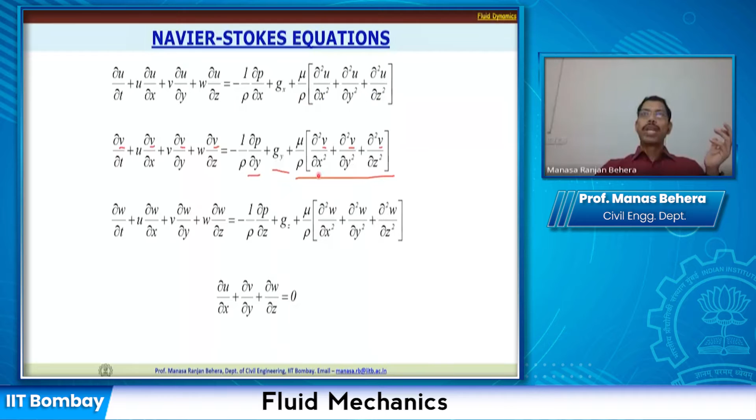So if it is del square, it is dou square by dou x square plus dou square by dou y square plus dou square by dou z square, and operated on u will give you that equation which we had written in our previous slide. Okay, this one. So this is nothing but your del square u. Similarly this is going to be del square v, this is del square w. So that is what we have written here. All right, now still you have these three equations.

Now if I write down in vectorial form this u, v and w as capital V, which is a vector, a combination of u, v and w in the respective directions, I can straight away write dV by dt is equals to g, the vector in the corresponding directions, minus 1 by rho del p. This del is again dou by dou x, dou by dou y, dou by dou z. So depending on the direction that you are trying to resolve, this term is going to come up.

And here again similarly you have mu by rho del square V. So if you are talking about x direction, u is going to come. If you are talking about y direction, v is going to come. If it is z direction, w is going to come. Okay, so finally we can write down this simple compact equation, which is nothing but your momentum equation of motion. And in addition you have this continuity equation which needs to be used to solve all the flow variables.

All right. Now having understood this, as I said some time before, this Navier-Stokes equation is applicable to solve real fluid flow problems. Now, if I have some place where I want to solve the flow which is considered as inviscid, or I really don't have to address the viscous effect of the fluid flow, in that case I can neglect this part, which is basically the force exerted due to the viscosity of the fluid, or the viscous force can be neglected.

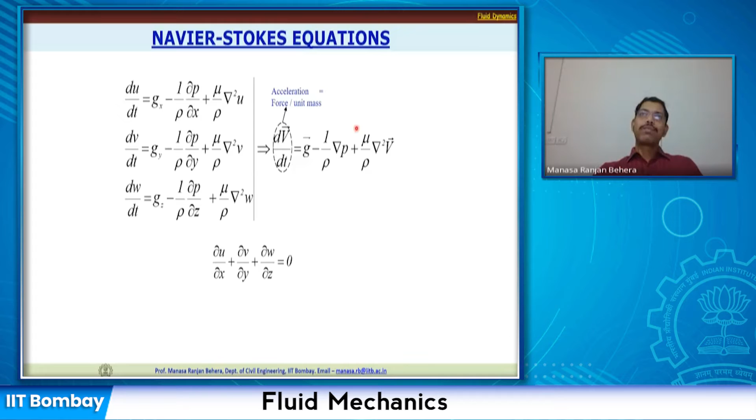Now if I do that, the equation that I'm going to get is nothing but your Euler's equation. So Euler's equation is applicable for inviscid flows. In other words, it is ideal fluid, where viscosity is not there. So the moment we say that the viscous effect is negligible, when we are not solving that mu by rho del square V term, then we can call it Euler's equation. So for Euler's equation we will not have the viscous term present.

So for all three different directions we can write down the terms. In addition to this, we will also solve the continuity equation, because still we have four unknowns. So we'll have to solve four equations, and all these four equations are nothing but your Euler's equations. Now, we have already derived the Navier-Stokes equation, and from that we have come all the way here.

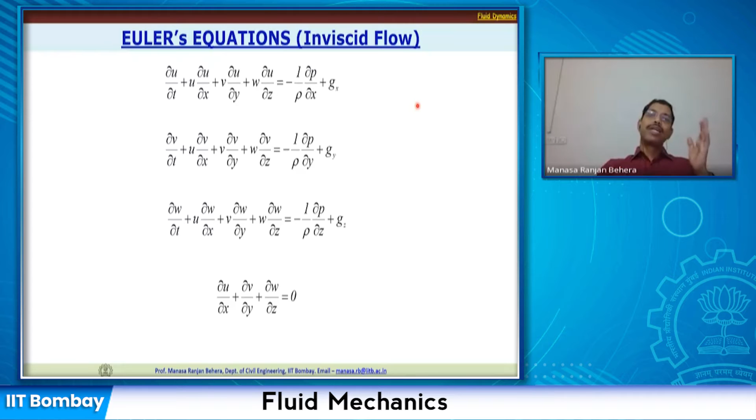But if somebody wants to derive the whole Euler's equation in a different way, that also is possible. So for that, you take one fluid element. Again, I am just taking a fluid element.

In this, you can either take P here, and the pressure here is going to be P plus ∂P/∂x into dx. Or if I take the pressure P at the center, then on this side it is going to be P minus ∂P/∂x δx/2 applied over the area δy δz, and on this face it is going to be P plus ∂P/∂x multiplied by δx/2 applied over the area δy δz.

Okay, so it's all the same, there's no difference. You do it this way or that way, finally the solution is going to be unique. So now let us consider this, which is basically an element having δx, δy, δz as the dimensions in the respective x, y, and z directions, and the body force acting on this fluid element is noted here as X, Y, and Z in the respective directions. It is the body force per unit mass.

So in this case, weight may be taken as a component of g, since force per unit mass is equal to acceleration. Now let us resolve in the x direction. We will write all the forces acting in the x direction and equate it to mass into acceleration. If you write it down, this is your expression. This is your mass: ρ δx δy δz, where δx δy δz is the volume, multiplied by density gives you the mass, multiplied by du/dt, which is your total acceleration. So mass into acceleration is equal to the force.

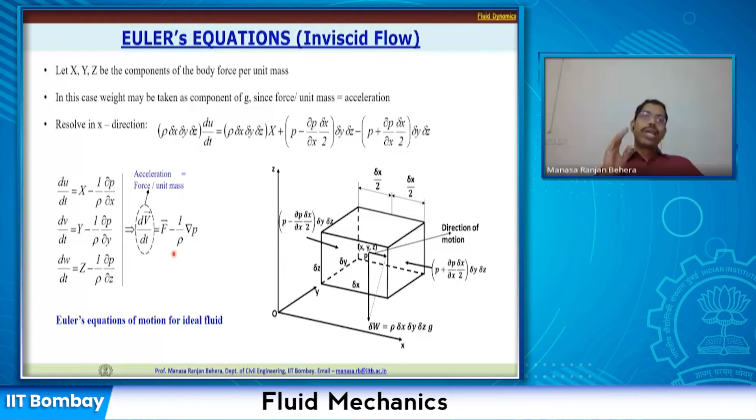It is given as acceleration, but we are actually equating the force per unit mass. Somebody will ask how could you equate acceleration to force? No, we are still equating force per unit mass to the forces also represented here per unit mass. So both sides are equal, there is no difference. Having understood this, the Euler's equation of motion is for ideal fluid. Now we will take this Euler's equation forward and derive the Bernoulli's equation, or the energy equation.

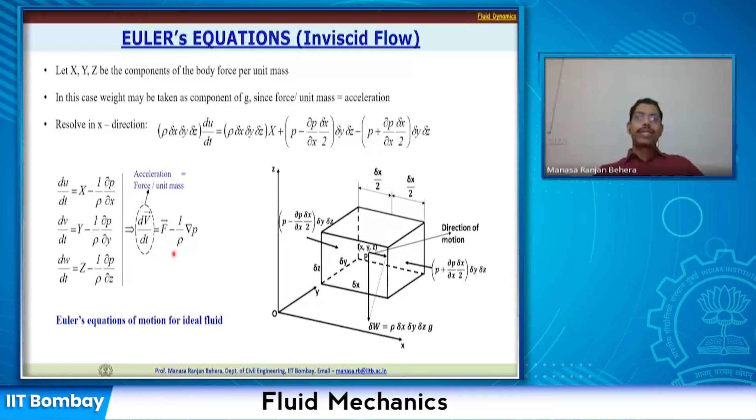We have seen the continuity equation, we have seen the equation of motion or momentum equation, and now let us see how this energy equation is derived or explained. Okay, now to look at that, let us quickly proceed to Bernoulli's equation. There are certain conditions that you should understand.

Bernoulli's equation we are deriving using the Euler's equation of motion. So all the concepts that we have discussed that are applicable for Euler's equation of motion are also applicable for Bernoulli's equation. Okay, so Bernoulli's equation is an approximate relation between pressure, velocity and elevation. We'll see how the equation is correlating all three of these.

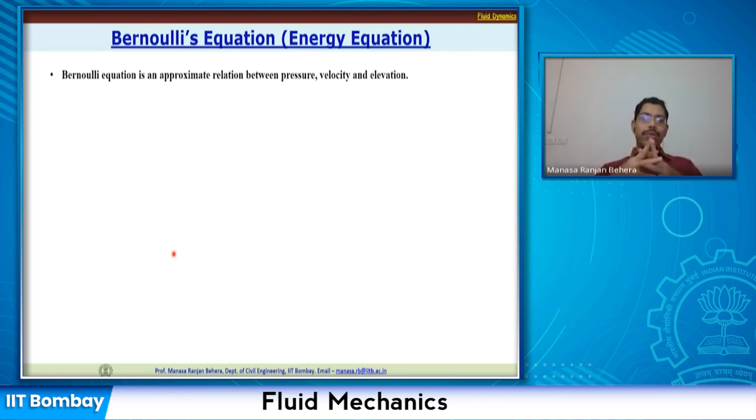Now, it is valid for irrotational flows and in regions of steady incompressible flow where net frictional losses are negligible. The moment we say it's inviscid, there is no viscous effect, so the friction is going to be negligible. So please remember that it is valid for irrotational flows as well as steady and incompressible flow. Integration of Euler's equation between 2 points will give you the energy.

Now we will do the integration, but before that, the force per unit mass multiplied by distance is nothing but your energy. So we are taking force per unit mass, then multiplying distance, so we will get energy per unit mass. Force into distance is energy, but because we are taking force per unit mass, what we are getting is energy per unit mass. So that is the basis for Bernoulli's equation.

Now, in other words, the total energy, we will see different energies in the next slides, but let us say total energy is nothing but your kinetic energy, potential energy, and an energy due to pressure. So basically the energy spent by pressure to move 1 unit weight of the liquid is nothing but the pressure head or pressure energy that we are talking about.

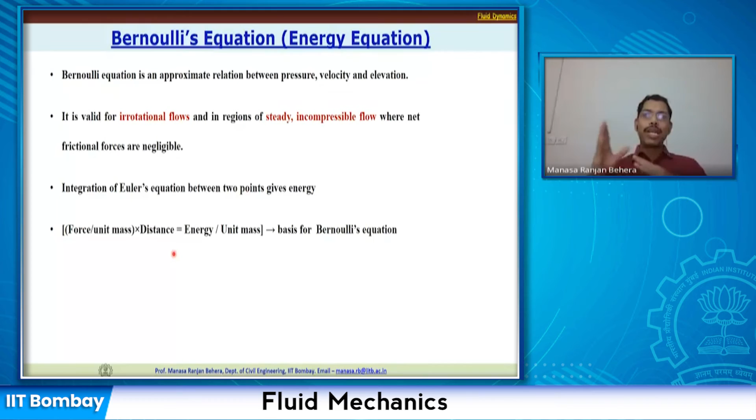Similarly, the kinetic energy, which is related to the velocity. The kinetic energy used to move 1 unit weight of liquid is the energy considered here. Similarly, potential energy. We'll see that as we move on and derive different terminology. So the gravity potential, this is just a notation, you can write it in any way.

So the potential, let us say, is omega, equal to plus gh. At some height you have the liquid, so the potential energy stored in that is nothing but plus gh. Or the force per unit mass in any direction is given by the negative derivative. We have already discussed this during the potential function, so I am not going to spend more time on this.

So we are taking X, the body force in the x direction, as the negative derivative of this gravity potential, minus dou omega by dou x. Similarly, Y is minus dou omega by dou y, and Z is minus dou omega by dou z. Now we have written this in one single term, the gravity potential omega. Now let us substitute this and write down the Euler's equation.

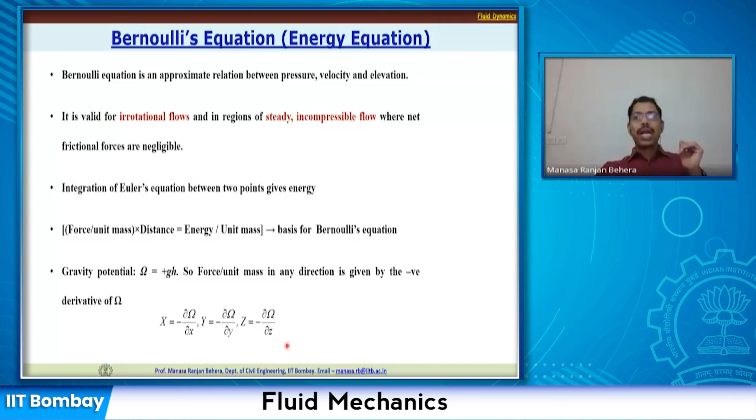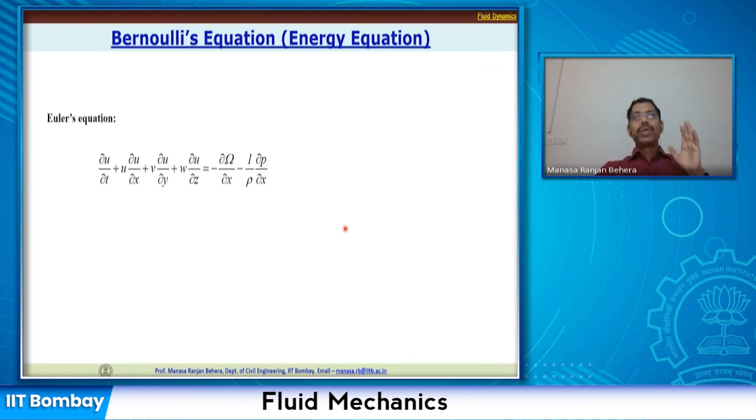If we write down the Euler's equation, the force per unit mass, or the acceleration that we have written here, is equal to the body force and pressure force together. And this gx, or X as we used to write earlier, is given as minus dou omega by dou x. Now, as we have already discussed, this is an irrotational flow, and for the conditions we have discussed, the potential flow theory is applicable.

If you remember, when we have the potential function, u can be written as minus dou phi by dou x, v is minus dou phi by dou y, and w is minus dou phi by dou z. So the value of u can be substituted using this phi. Let us say the value u here, only in the dou u by dou t term, we will substitute with this expression, minus dou phi by dou x.

So now similarly, we know the flow is irrotational. So if you write down the terminology, then we know that omega, which is the rotation, omega x, omega y, omega z, are supposed to be 0. So if it is 0, we can write down that, if you remember, omega z is equal to 1 by 2 multiplied by dou u by dou y minus dou v by dou x. So if you equate that to 0, you can write down dou u by dou y is equal to dou v by dou x. Similarly, you can write down this expression: dou u by dou z is equal to dou w by dou x. Okay, so based on the irrotationality condition, we could write down these expressions.

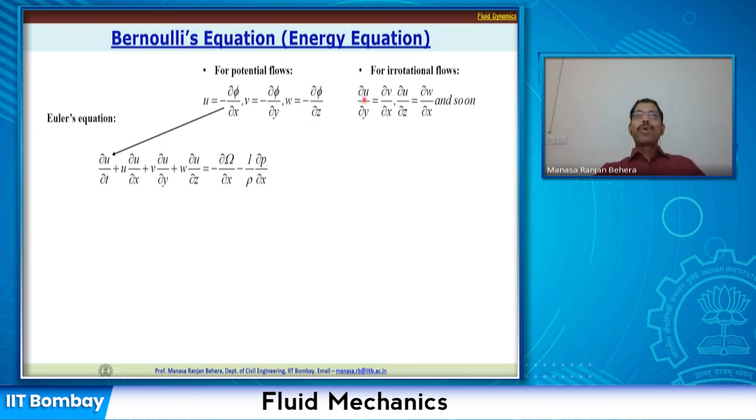Now let us make use of this. I am going to substitute this dou u by dou y using this expression, so I will substitute with dou v by dou x. And this one, that is dou u by dou z, I will substitute with dou w by dou x. So basically all the denominators are going to be dou x, so that it will be easy for me to integrate and find a solution. All right, so that's the whole idea.

So now once we have this, let me rewrite this expression. I could write down minus dou by dou x multiplied by dou phi by dou t plus u dou u by dou x plus v dou v by dou x plus w dou w by dou x. That's equal to minus dou omega by dou x minus 1 by rho dou p by dou x. Now I can integrate the whole term with respect to x.

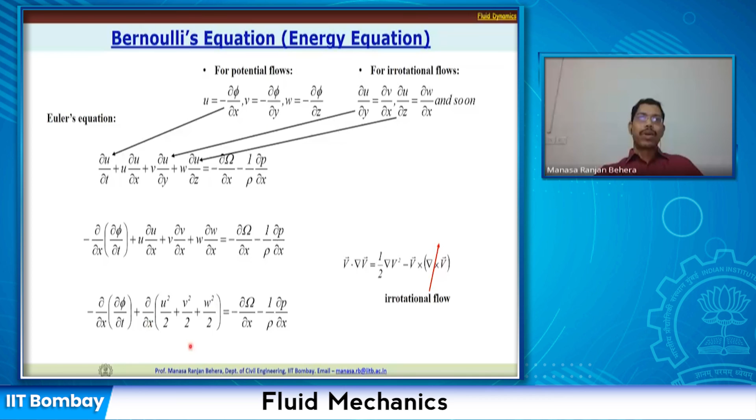Okay, so before integrating, I have written this expression, where you can see all the other terms are the same except this u, v, w term, which has been written as dou by dou x of u square by 2 plus v square by 2 plus w square by 2. This is written based on the expression V dot del V is equal to 1 by 2 del V square minus V cross del cross V. Now here, because the fluid is irrotational, this cross product term is going to vanish. So we have only this. Based on this, we could convert this expression like this. All right, so we will take that and integrate now.

Now if I take that same equation and integrate with respect to x, I'll get p by rho, which, if brought to the other side, will be positive. So p by rho minus dou phi by dou t plus these three terms together, which I am noting down as V square by 2, plus omega is equal to some constant. This integration gives rise to a constant which could be a function of y, z and t, because the whole thing is a function of x, y, z and t, and because we are integrating with respect to x, the constant could be a function of y, z and t.

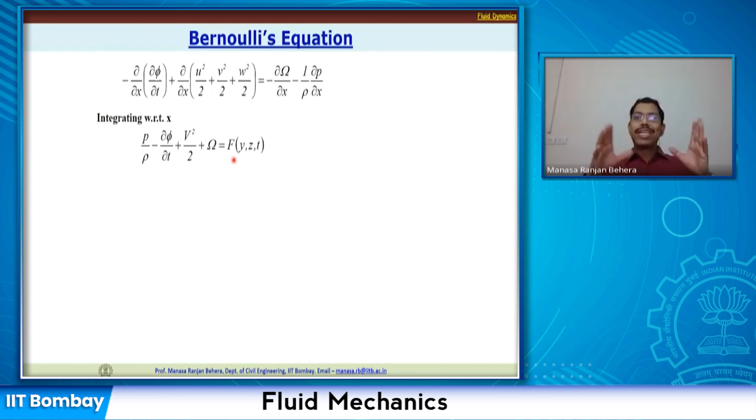Now similarly, if we derive the expressions for the y direction, I will be able to get the same expression with a constant which could be a function of x, z and t, and in the z direction I will get a constant which will be a function of x, y and t. So in all these three cases, the right hand sides must be equal, because the left hand side in all three cases is equal. If all three have to be equal, then they cannot be functions of x, y or x, z or y, z. They can only be a function of t. Therefore the right hand side is either a function of t alone or it's a constant.

Okay, so now we can rewrite this expression as p by rho minus dou phi by dou t plus V square by 2 plus omega is equal to a function of t, or it's a constant. So this is nothing but your Bernoulli's equation. All right, now let us try to simplify further and apply it to some different problems.